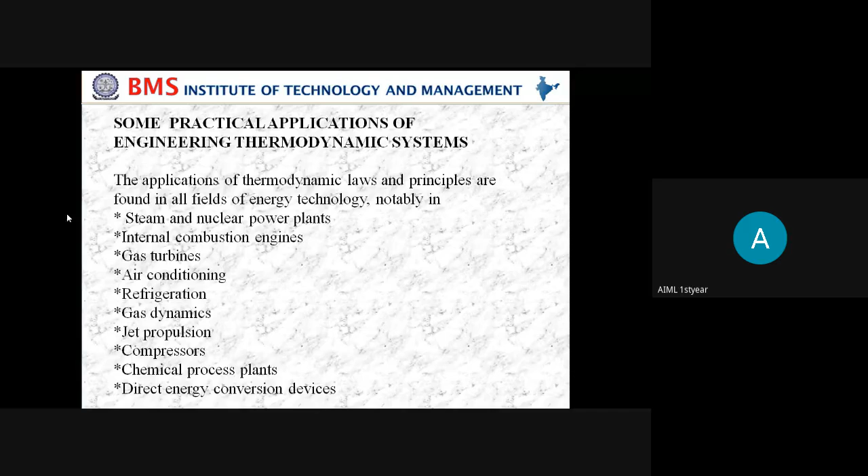We studied the difference between the macroscopic approach and microscopic approach. In the macroscopic approach, a certain quantity of matter is considered for the analysis. In the microscopic approach, the events occurring at the molecular level are taken into consideration.

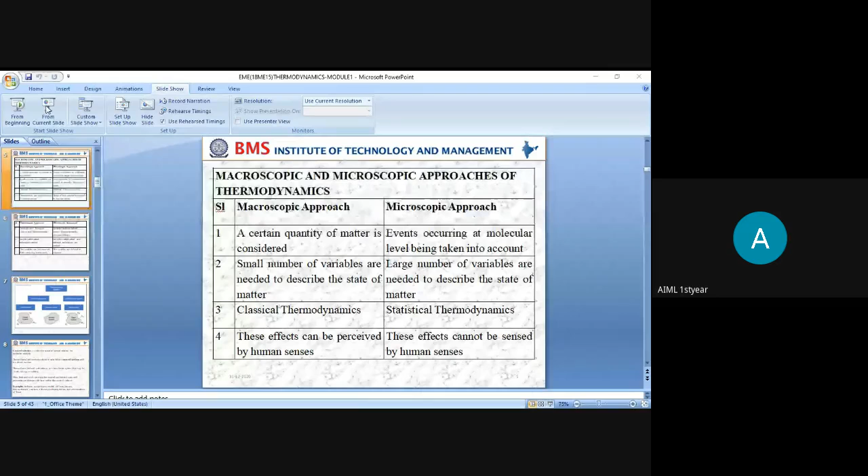A certain quantity of matter is considered in the macroscopic approach. According to the microscopic approach, the system is composed of a number of small discrete particles known as molecules, and the events occurring at the molecular level are taken into consideration.

The macroscopic approach is also called classical thermodynamics, and the microscopic approach is also called statistical thermodynamics. In the macroscopic approach, a small number of variables are required to know the state of the system. In the microscopic approach, a large number of variables are required to describe the state of matter.

The effects can be perceived by human senses in the macroscopic approach. For example, pressure, temperature, volume, etc. can easily be perceived by our senses. If there is a change in temperature in a body, we can definitely sense it.

On the other hand, the effects produced in the microscopic approach cannot be sensed by human senses, because the events occur at the molecular level.

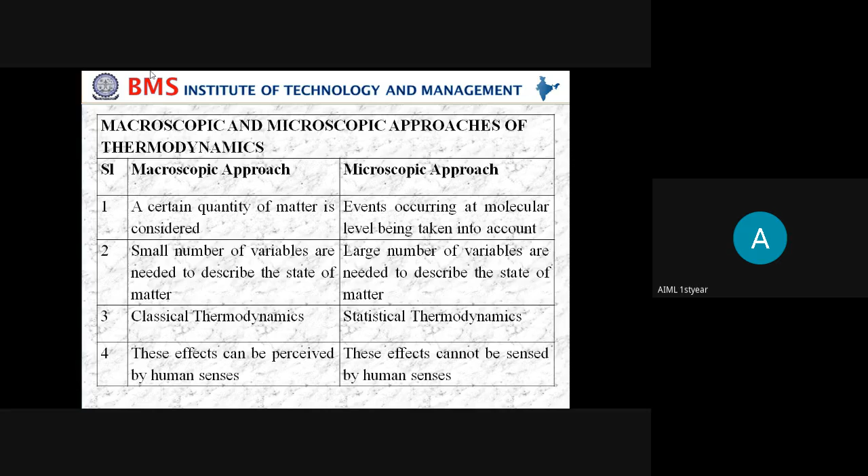The variables involved in the macroscopic approach are pressure, volume, temperature, etc. The variables in the microscopic approach include kinetic energy, rotational energy, and vibrational energy. Simple mathematical techniques are required for the macroscopic approach, while complex mathematical and statistical techniques are required for the microscopic approach.

Another difference is that variables in the macroscopic approach can be measured with measuring instruments, because for temperature we can measure with a thermometer, thermocouple, pyrometer, etc. In the microscopic approach, variables like kinetic energy, rotational energy, and vibrational energy are very difficult to measure. These are the differences between the macroscopic approach and microscopic approach.

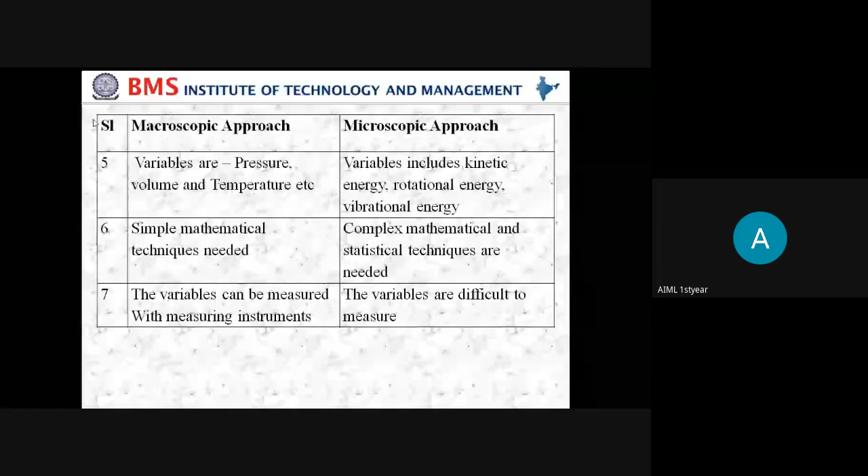Next we discuss the thermodynamic system. First you should know the definition: it is the quantity of matter or the region in space upon which our attention is concentrated in the analysis of a problem.

The thermodynamic system is divided into three types: closed system, open system, and isolated system. The closed system is also called a system of fixed mass, where the mass of the system remains constant.

Only energy transfer takes place between the system and surroundings. Remember, thermodynamics mainly deals with energy transfer and also mass transfer. In a closed system, it is a system of fixed mass, and only energy transfer takes place between the system and surroundings. Surroundings means whatever is external to the system.

The system has a boundary, which may be fixed or movable. The boundary is the layer that separates the system from the surroundings, and together the system and surroundings are called the universe. In a closed system, the mass of the system remains constant.

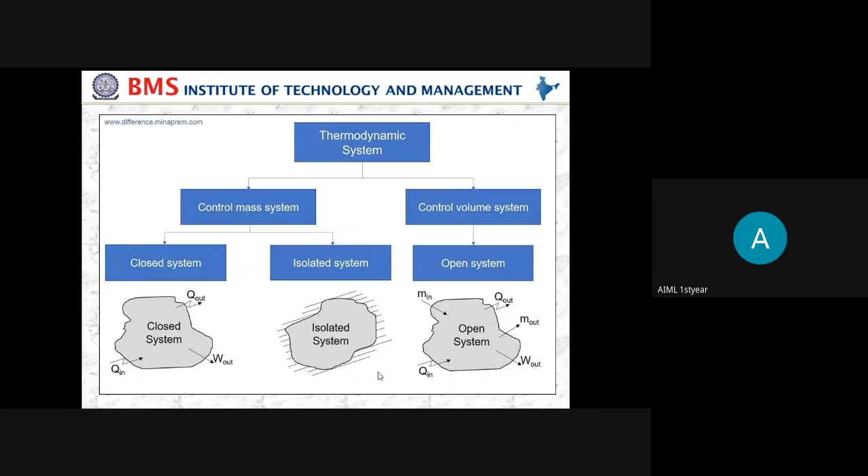So whenever they ask to explain these terms, we have to draw the diagrams. These are the diagrams, and you have to write the definition with examples.

And we studied thermodynamic properties. Every system has certain thermodynamic characteristics by which its physical condition can be described. For example, volume, temperature, pressure, etc. And these are all macroscopic in nature.

Intensive property - these are properties which are independent of mass. Example, pressure and temperature. Extensive properties are the properties which are related to the mass.

Yesterday I was telling about density. You remember density is the intensive property. Density is the ratio of mass by volume. So mass and volume both are extensive properties. So the ratio of extensive to extensive becomes intensive. Please remember, density is the example of intensive property.

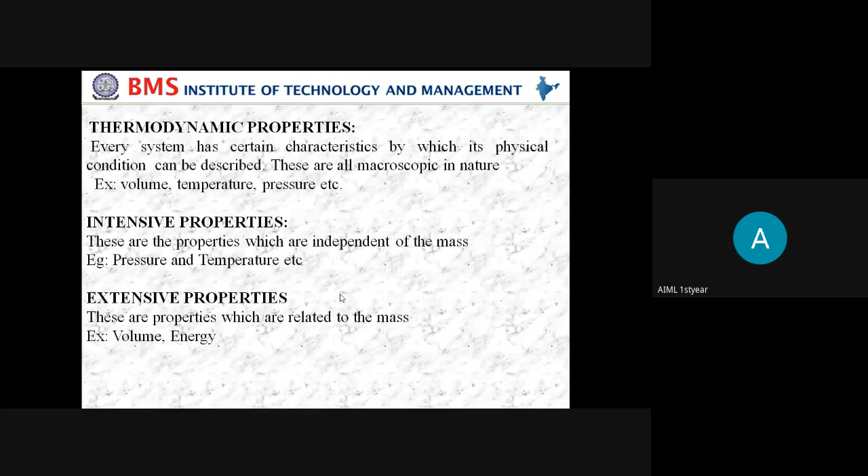But the volume and energy are the examples of extensive property. Density, I'm telling again, it is the example of intensive property because it is the ratio of extensive property to extensive property. Density is given by mass by volume. So both are extensive properties. The ratio gives the intensive property. Density is an example of intensive property.

Next we studied thermodynamic process. When the path of the system is completely specified, then the change of state is called a thermodynamic process. Can you tell what is the difference between adiabatic and polytropic? Anybody?

What is the difference between adiabatic process and polytropic process? Sir, in adiabatic, no heat transfer, and in polytropic, heat transfer is there. Good. What is the equation? Do you know the equation in case of adiabatic process? PV to the power gamma is equal to C. Correct, good. What about polytropic process? PV to the power N is equal to constant.

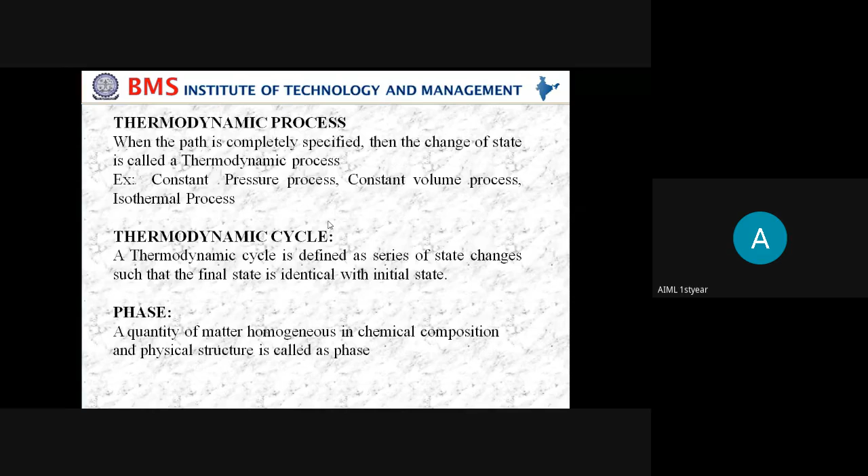Good. So we have mainly five processes in thermodynamics. One is constant volume process, second one is constant pressure process, third one is isothermal process, fourth one is adiabatic process, and fifth one is the polytropic process.

I explained all the PV diagrams, so I'll explain once again. First one is constant volume process, also called isochoric process - you should remember the name also. Another name for constant volume is isochoric process, and it is represented by the vertical straight line because the volume remains constant. Here 1 to 2 - one is called state point 1, and 2 is state point 2.

So thermodynamic process is when the path is completely specified, it is called thermodynamic process. Here we are going to take the system from state point 1 having its own properties like P1, V1, and T1. When it undergoes the sequence of changes, it reaches final state 2, having P2, V2, and T2 as properties at state point 2. Here V1 equals V2, hence you have to represent it by the vertical straight line. And here it is P1 and it is P2. This is the x coordinate V and y coordinate P. We have to take it like that only. This is the PV diagram.

Like that, we are coming across so many diagrams - HS diagram, TS diagram, and TV diagram. But PV diagram is the most important diagram from the thermodynamic point of view.

Second process is constant pressure process, also called isobaric process. So in constant pressure process, the pressure of the system remains the same, but only the volume and temperature change.

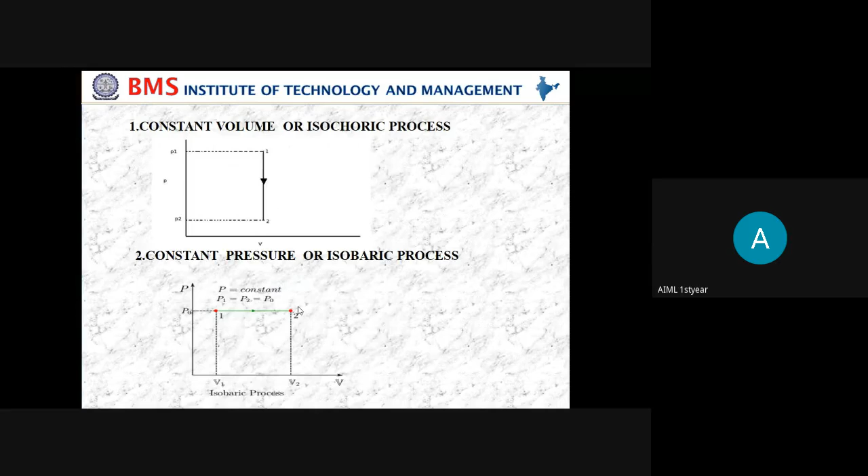The second process, or third process, is called constant temperature process or isothermal process. Here both pressure and volume change. This is the nature of curve in case of constant temperature process, and the equation is PV equals to constant. How we get PV equals to constant: we have the ideal gas equation.

PV equals to MRT. P is pressure of the gas, V is volume of the gas, M is mass of the gas, R is general gas constant, and T is temperature of the gas. M is constant, that is the mass of the gas remains constant. R, the general gas constant, is also constant. And in case of isothermal process, T is also constant. So we can write the equation as PV equals to constant, or PV equals to C, in case of isothermal process.

Here it is state point 1, it is P1. Then state point 2, it is P2 on the y coordinate. X coordinate it is V1, and here it is V2. So this is the representation of isothermal process. It is a hyperbola in nature, from 1 to 2.

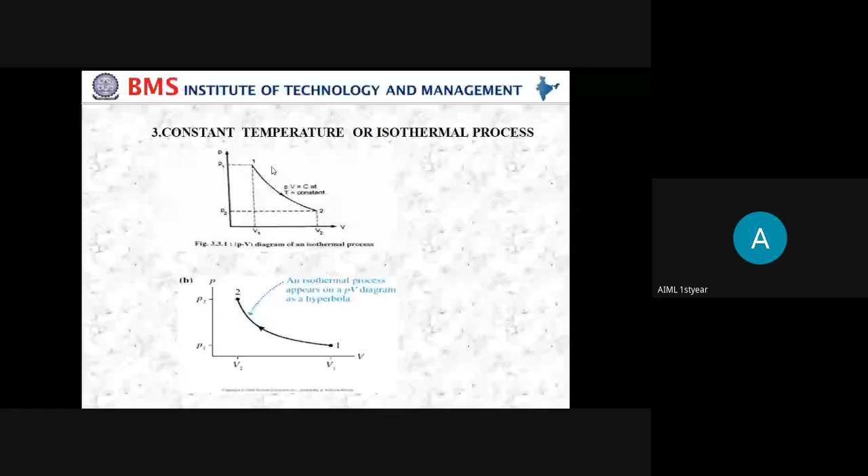Next, we have the adiabatic process. Adiabatic process is the one in which there is no heat transfer takes place between system and surroundings. So we have certain devices where an adiabatic wall is provided to prevent the transfer of heat from system to surroundings, especially in some devices. We have adiabatic examples, for instance, in case of boiler and those things.

A boiler is a closed metallic vessel where steam formation takes place from water at constant pressure. In order to prevent the transfer of heat from the device to the surroundings, the adiabatic wall is provided. Adiabatic process is the process in which there is no heat transfer between system and surroundings, and the nature of curve is same for isothermal, adiabatic and polytropic processes, but only the equation changes.

Remember, the nature of curve for isothermal, adiabatic and polytropic processes are all the same. They are hyperbolic in nature, but only the equation differs. In case of isothermal process, we have the equation PV equals to constant, and in case of adiabatic process, we have the equation PV raised to gamma equals to constant, where gamma is a Greek letter, and it is the ratio of specific heats, that is Cp by Cv.

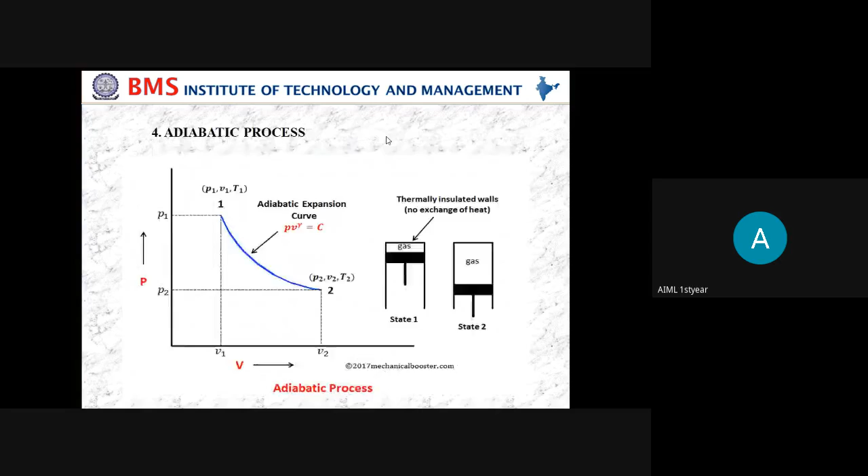Gamma is always the ratio of Cp by Cv. On the other hand, the polytropic index n is just an index, maybe less than 1.4 or maybe greater than 1.4, depending upon the type of gas used in the process. That is the difference between adiabatic process and polytropic process. Remember all the nature of curves for the five processes.

One more thing is that we studied thermodynamic process, which is a process when the path is completely specified. For example, we have an initial state and final state, having initial properties P1, V1 and T1, and final properties P2, V2 and T2.

We are having another process called a cyclic process. Cyclic process, also called a thermodynamic cycle, is defined as a series of state changes such that the final state is identical with the initial state.

Now look at the PV diagram. We have the initial state point C, having properties P1, V1 and T1. Take any properties, and it reaches the final state A by following path B, undergoing these state changes.

These are the state changes. We have intermediate state points, where C is the initial point and A is the final state point. Initially we have P1, V1 and T1, and finally we have properties P2, V2 and T2.

Now I'm going to take the process back from state point A to C by following path D. So first it undergoes from initial state to final state A, then comes back to the initial state. The initial state and final state are identical, so such a process we call a cyclic process or thermodynamic cycle.

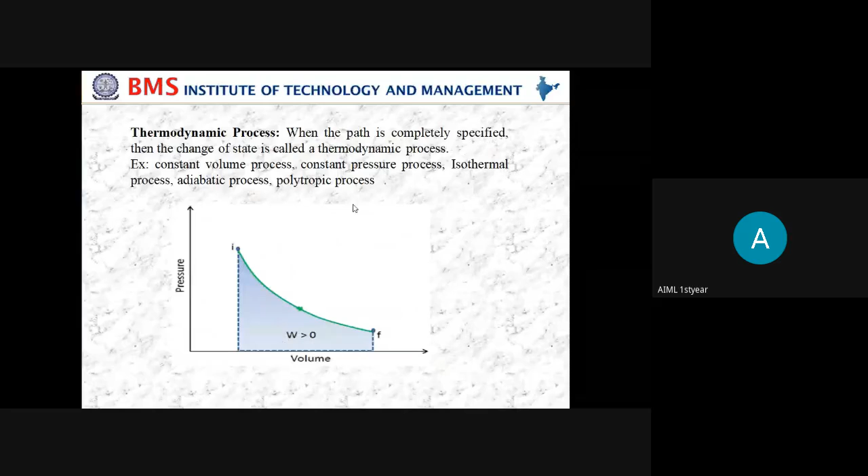But remember, whatever we studied before is not a cyclic process, just a thermodynamic process, because it does not return to the initial state. If it returns from final state to initial state, we call it a thermodynamic cycle. What we discussed yesterday and today are all just thermodynamic processes, meaning the initial and final states are not identical, they are different.

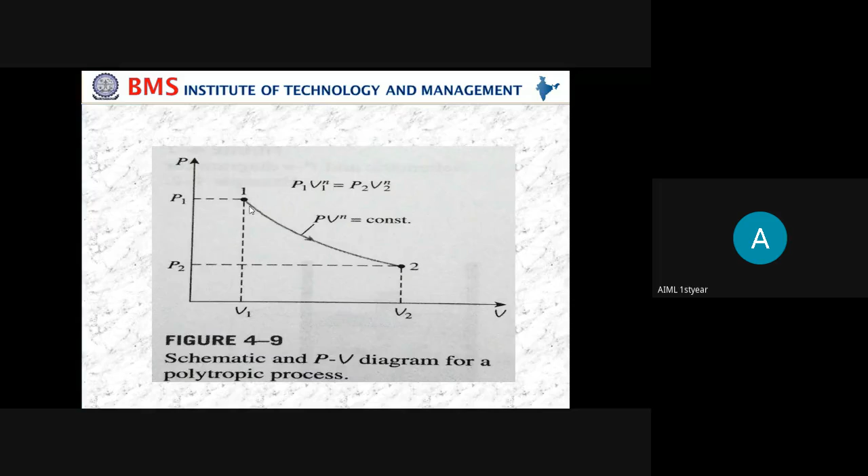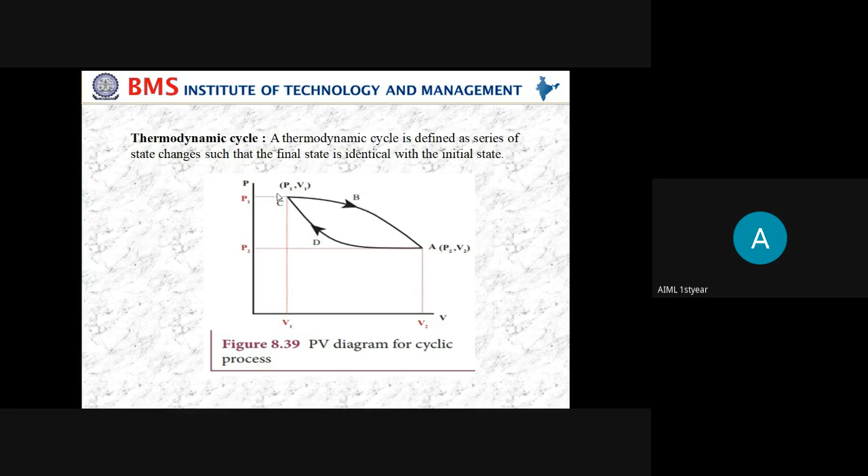But in case of a thermodynamic cycle, the initial and final conditions are the same, because it undergoes a change of state from initial state to final state and comes back to the initial state. So the initial state is identical with the final state. This kind of process is called the cyclic process.

One more thing, next we have two systems: one is a homogeneous system, and the second one is a heterogeneous system. A homogeneous system is the one which is having a single phase.

For example, take water, it is in a single phase. Or take solid ice, that is in a solid phase. That is a homogeneous system. A heterogeneous system means when a system comprises more than one phase.

Can you give an example of a heterogeneous system? Anybody? It is a mixture of two phases, a heterogeneous system.

Water and oil is a good example, because the oil floats on the surface of water. Can you tell why oil floats on the surface of water? What is the reason? Because its density is lesser than water.

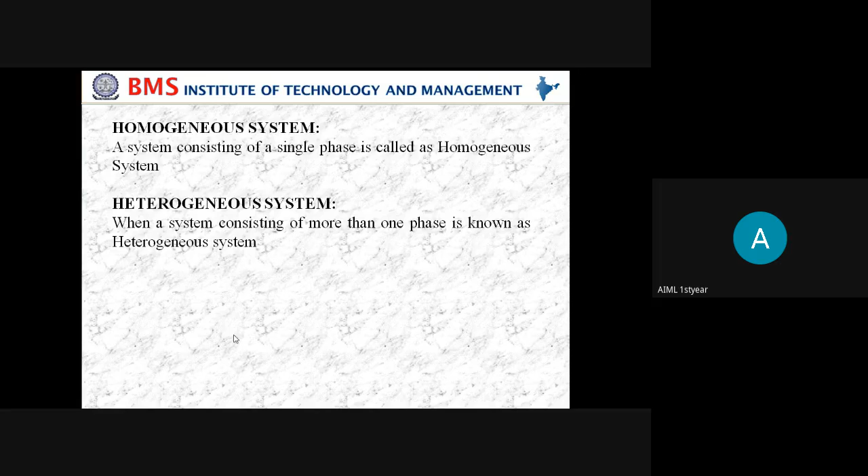Next, coming to the laws of thermodynamics.

Sir, can we consider the Carnot cycle an example for thermodynamic cycle? Yeah, it is a thermodynamic cycle only. Carnot cycle is a thermodynamic cycle, but it is a theoretical cycle. We have so many cycles - petrol cycle, diesel cycle, everything in an internal combustion engine. Carnot cycle is theoretical. In case of Carnot cycle, we achieve maximum efficiency. Remember, but no heat engine gives 100% efficiency.

Carnot cycle has mainly four processes. As I said, a cycle starts from an initial point, undergoes a sequence of operations, and comes back to the original state point. We have two isothermal processes and two adiabatic processes. It is a thermodynamic cycle only, but not a practical cycle. Do you have any idea why it is not used as a practical cycle?

Anybody know? Do you have any idea? Sir, Carnot because of the efficiency. Good, efficiency - no, what is the reason? We achieve maximum efficiency in case of Carnot cycle, but actually it is not possible.

Yes sir, why - let me tell you, in case of Carnot cycle. Just a minute, share that slide if it's okay. We have four processes - two isothermal processes, meaning two constant temperature processes, and two adiabatic processes, in case of Carnot cycle.

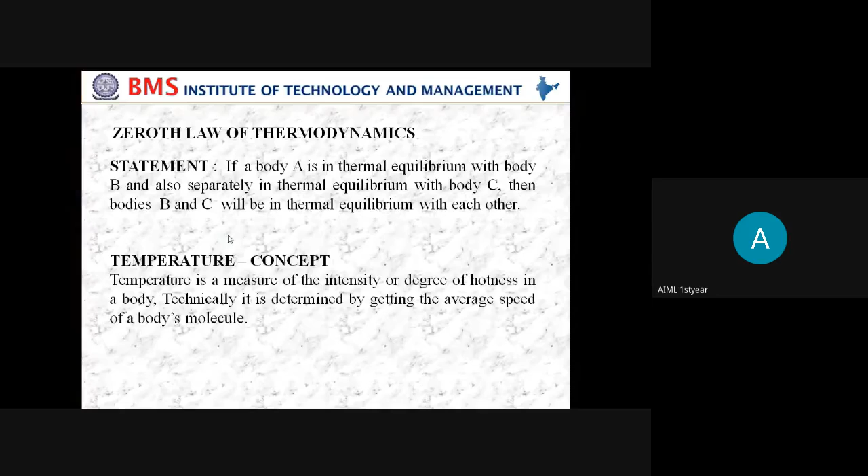And the zeroth law of thermodynamics: if a body A is in thermal equilibrium with body B, and also separately in thermal equilibrium with body or system C, then the systems B and C are in thermal equilibrium with each other.

So this is the statement of zeroth law of thermodynamics. For that purpose, you have to draw a simple diagram. You have to show three bodies: system A, system B, and system C. You have to join A with B, A with C, and also B with C.

In the statement, if a body or system A is in thermal equilibrium with body B, and also is in thermal equilibrium with body C separately, then the bodies B and C will be in thermal equilibrium with each other.

So in mechanical engineering, we have equilibrium conditions. There are three equilibrium conditions: one is mechanical equilibrium, second is thermal equilibrium, and third is chemical equilibrium. There is one more, called electrical equilibrium, but we don't consider that in mechanical engineering. So mainly we deal with three equilibrium conditions: mechanical, thermal, and chemical.

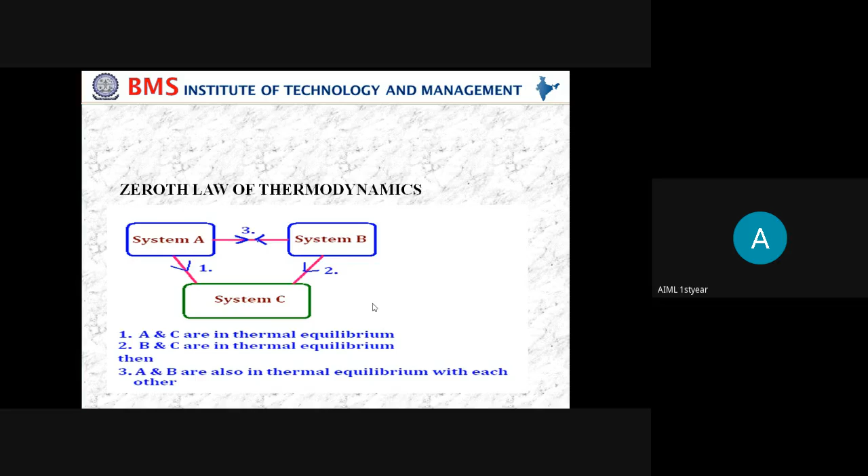So the zeroth law of thermodynamics states that when a body A is in thermal equilibrium with body B, and also separately in thermal equilibrium with body C, then the bodies B and C will be in thermal equilibrium with each other. This is the statement of the zeroth law of thermodynamics. Do remember, you have to draw this diagram for giving the statement.

Next, coming to the definition of work and heat. As I said, thermodynamics mainly involves energy transfer. We have different forms of energy: mechanical energy, chemical energy, nuclear energy, vibrational energy, rotational energy, work energy, heat energy, etc. But from a thermodynamics point of view, we are going to discuss mainly two types of energy: work and heat.

We already studied the mechanics or physics definition of work: it is the product of force and displacement, and the unit of work in mechanics is Newton meter. When force is applied on a body, it moves in the direction of the force and gives a displacement. The product of force and displacement is called the amount of work done. Force is expressed in Newton, and displacement in meter, so the unit of work is Newton meter, and 1 Newton meter equals 1 joule. That is the mechanics definition of work.

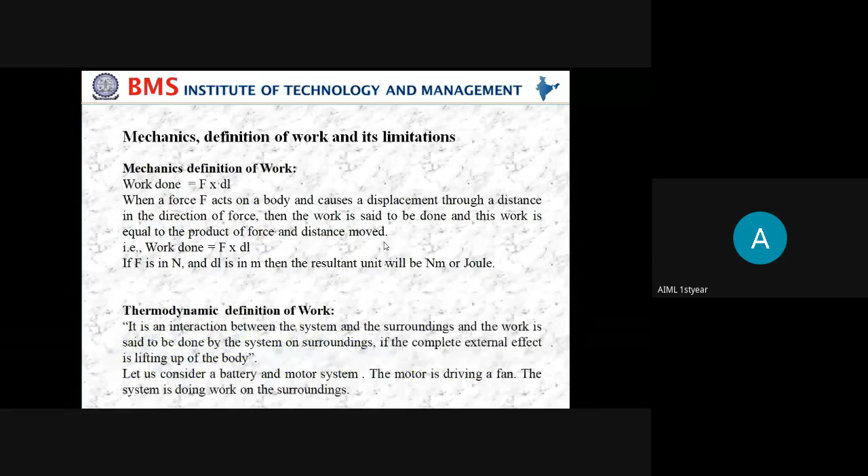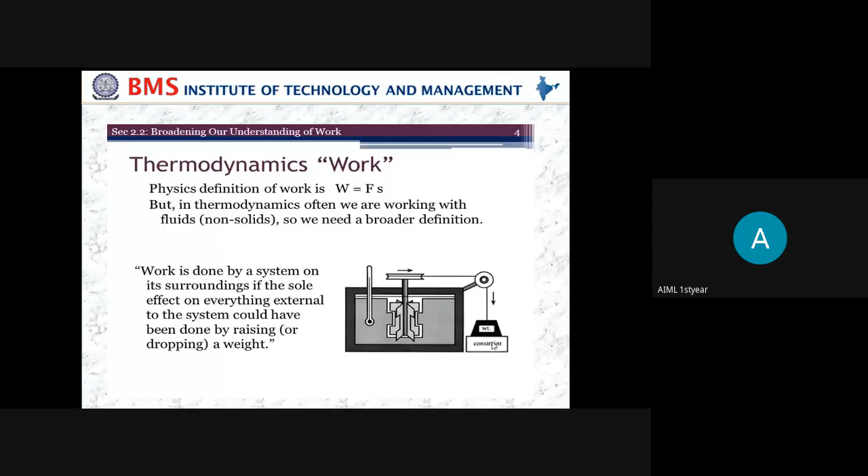And the notation is: the work done by the system is positive, and the work done on the system is negative.

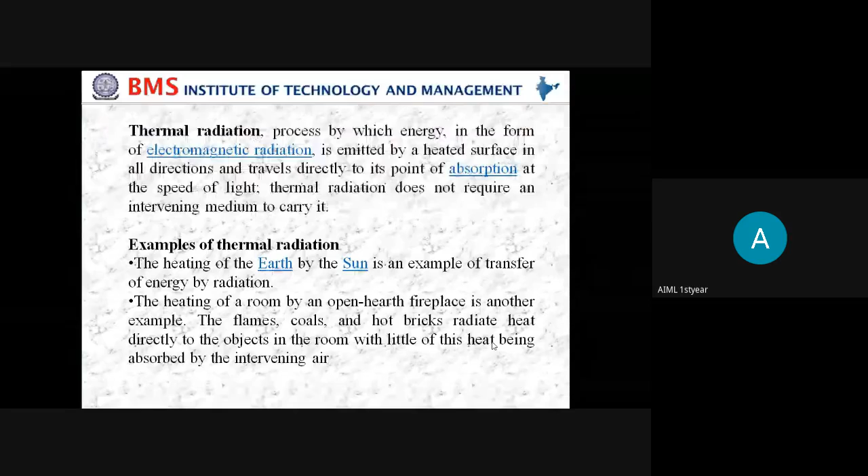Next, we are having one more term called heat. Heat is a form of energy. How does it take place? It takes place by virtue of temperature difference only.

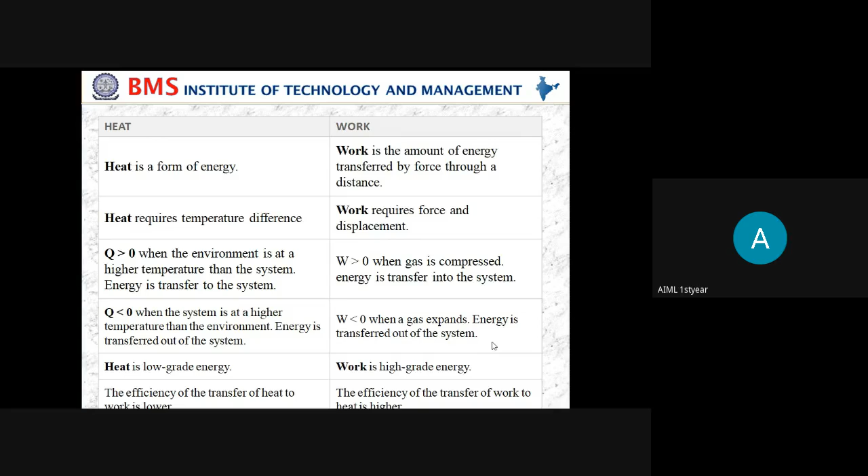Heat always flows from the higher temperature gradient to lower temperature gradient. That concept I am going to explain in second law of thermodynamics. Heat is a form of energy which occurs by virtue of temperature difference, and the unit is joule. Regarding sign convention, whenever you add heat to the system, the energy is increased, meaning Q is positive.

Whenever heat added to the system is positive, whenever heat taken from the system is negative. If you withdraw some quantity of heat from the system, the energy of the system decreases, hence it is represented as negative. But it is different for work done: if work is done on the system, it is negative; if work is done by the system, it is positive. If heat is taken into the system, it is positive; when heat is taken out of the system, it is negative. So these are the sign conventions, and the unit is the same, that is Newton meter.

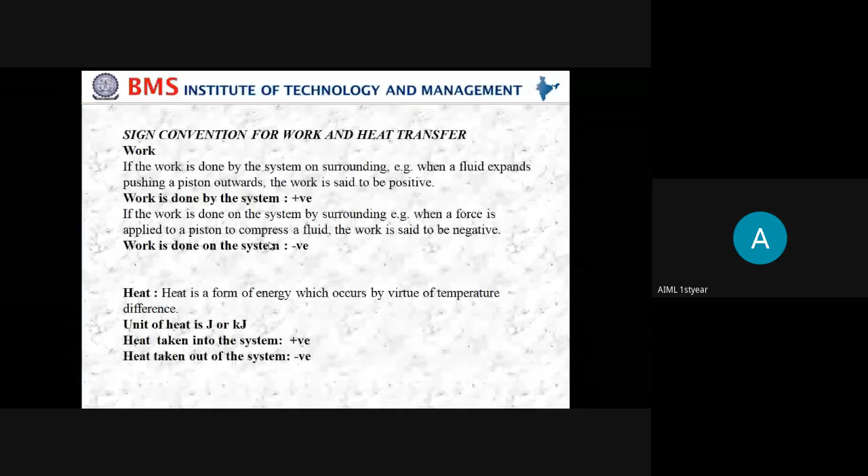And we are having three modes of heat transfer: one is thermal conduction, one is thermal radiation, and the third one is thermal convection. Remember, there are three forms of heat energy transfer: one is thermal conduction, second is convection, and third is radiation.

Conduction: as you heat some metallic rod, the temperature gradually increases, and then the heat flows from higher temperature gradient to lower temperature gradient. That is an example of thermal conduction within a solid body, or when two bodies are in direct contact, and heat transfer takes place from one body to another body.

So thermal conduction is a mode of heat transfer which takes place in a solid body or between two different bodies which are in direct contact with each other. That is the mode of heat transfer called conduction. I think you studied conducting materials and those things.

So copper, brass, silver, gold - these are all very good conductors of heat, these are the conducting materials. Conduction is the mode of heat transfer which takes place in a body itself, or when two bodies are in direct contact, then the flow of heat takes place from one body to another body. That is an example of thermal conduction.

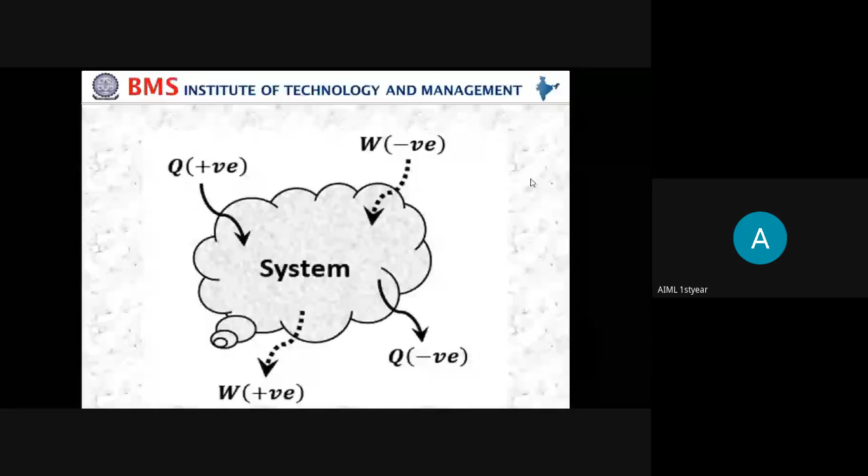Similarities between heat and work. Okay, I defined heat. Heat is a form of energy which occurs by means of temperature difference. Heat added to the system is positive, and heat taken from the system is negative. Okay, sometimes they may ask this.

Explain the similarity between work and heat transfer. Whenever it comes to similarities, both are energy interactions. Both are transient phenomena, both are boundary phenomena, meaning they cross the boundary. They are not a property of the system, and both are path functions.

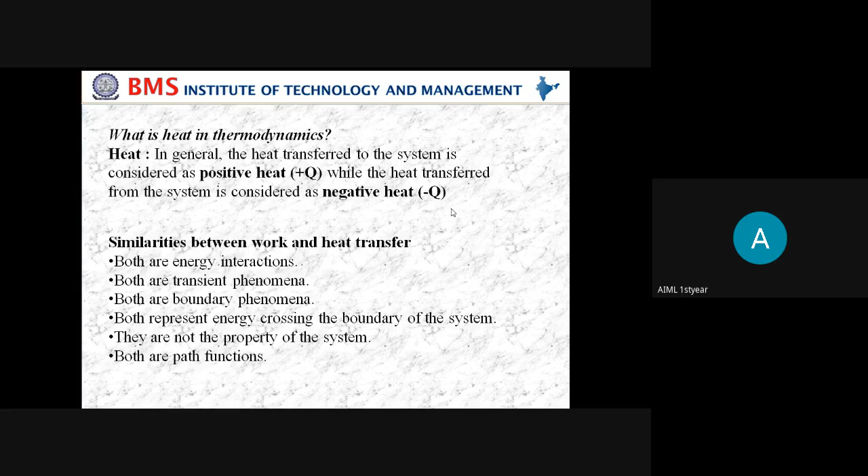These are the similarities. Coming to the dissimilarities: heat transfer takes place by virtue of temperature difference only, no other parameter is involved in heat transfer. But work is not like that.

The work transfer takes place by means of a change in any property, like change in pressure, change in volume, change in magnetic field, change in potential, like that. Whatever the parameters, we have so many parameters in work, but heat is not like that.

Heat transfer always takes place by virtue of temperature difference only, but work transfer or work energy takes place by means of a difference in other parameters also.

Second, we can tell that heat is a low grade energy and work is a high grade energy. We can completely convert work energy into heat energy, but the reverse is not possible. We cannot convert 100% of heat energy into work energy, because heat is low grade energy.

So many losses take place because of this; heat cannot flow from a lower temperature gradient to a higher temperature gradient. So we can tell heat is a low grade energy and work is a high grade energy.

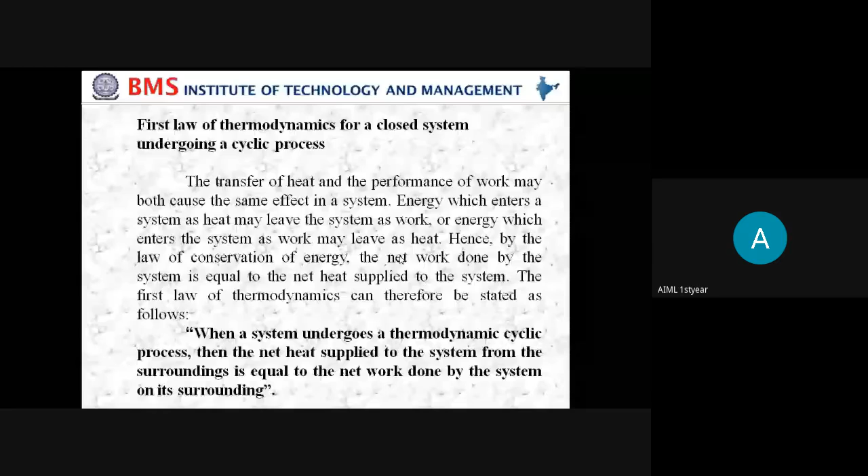So concentrate on the mechanics definition of work. Next, the thermodynamics definition of work, because you have to explain the thermodynamics definition of work with a simple example, what I explained. Next, we studied that.

Sign convention for work transfer and heat transfer, and then definition of heat, unit of heat, sign convention of heat, different modes of heat transfer, then dissimilarities and similarities between work and heat transfer. So you have to think of these yourself and write these points.

Work is a high grade energy. Heat transfer is a low grade energy. Complete conversion of work is possible. Complete conversion of heat is not possible. There are only three modes of heat transfer. There are many kinds of work transfer. Like that, you have to think.